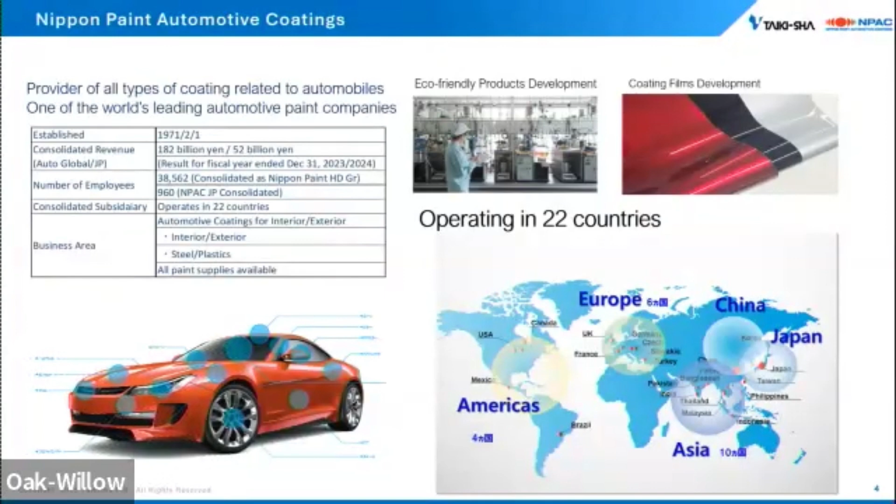Next, let me introduce Nippon Paint Automotive Coating. We call it NPAC, a key subsidiary of the Nippon Paint Group. NPAC is one of the world's leading automotive coating companies and operates in 22 countries around the world under a strong global network. In response to recent environmental issues, we are developing environmentally friendly paints and coating films with a view to eliminating the need for painting. Today, we are pleased to present results of a collaborative effort between these two companies, showcasing the synergy achieved through this partnership.

Next, let's move on to our target. A major theme in the world today, and of course, specifically in the automotive industry, is carbon neutrality. Nearly every major OEM has announced their goal towards carbon neutrality, not only within the use of their products, but the complete life cycle of those products, including its manufacturing. We are all, of course, aware of the paint shop status as one of the primary energy consumers and carbon emitters within the manufacturing portion of the product life cycle. And innovation is necessary in order to achieve these fast approaching targets.

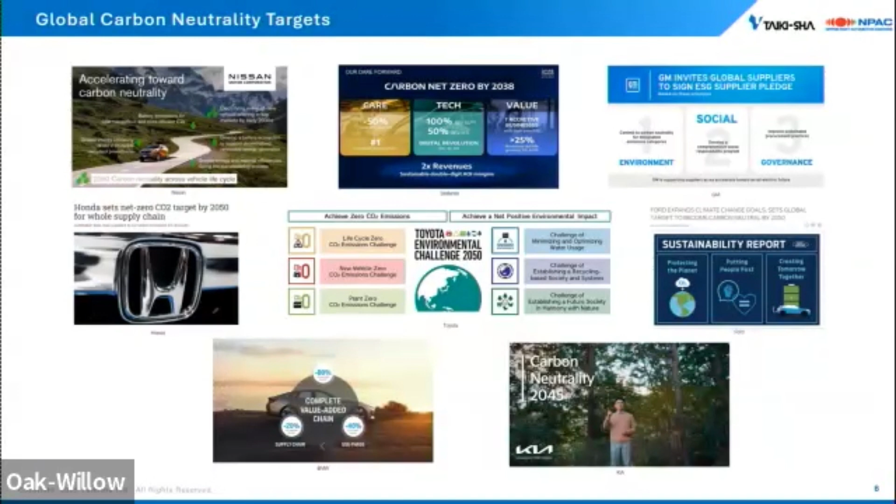So, what can we do as material supplier and line builder to support our customers? The focus comes on how can that directly and indirectly impact our customers' emissions. In upstream scope 3, we can consider reducing material usage, recycling materials, and lowering energy consumption in our own manufacturing process. In scopes 1 and 2, we can provide them with processes with lower energy requirements and a smaller footprint. And in the downstream scope 3, can our processes enable greater product efficiency through weight reduction and be compatible with the EV manufacturing process in general?

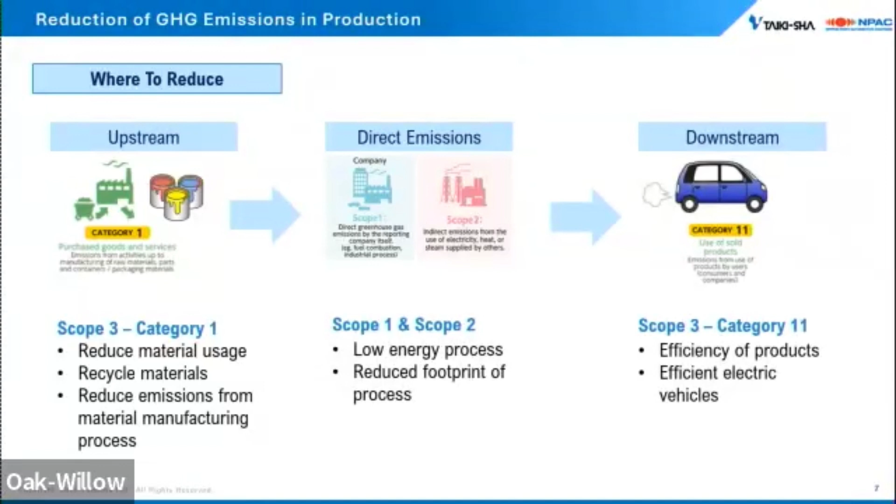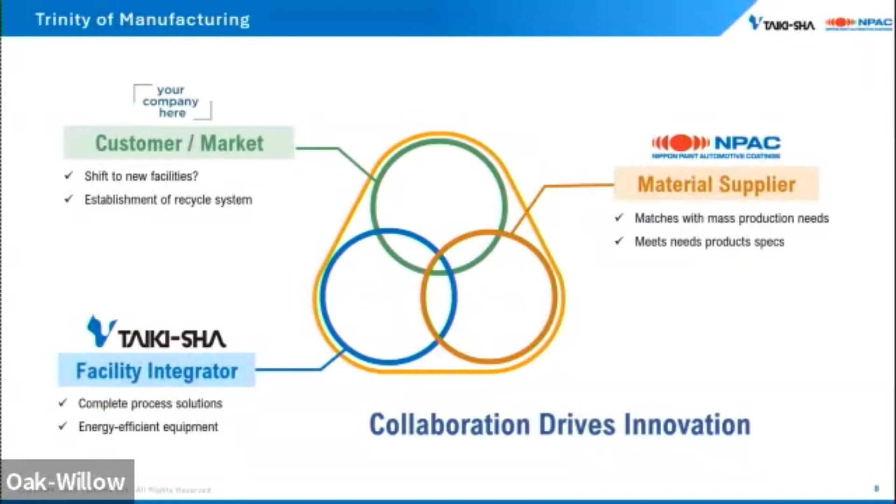Instead of simply pushing current methods to their limits, our approach is to offer a completely new option by transforming the coating process itself. How do we achieve this solution? We believe collaboration among the three sectors of the manufacturing industry, the material suppliers, equipment suppliers like ourselves, and OEMs, is critical to driving sustainable innovation, as this conference is focusing on. Today, we'd like to introduce our film decoration technology, share demo trial results, and explore how teamwork can lead to further process improvements, helping us get closer to realizing the broader benefits of this solution.

Now I'd like to show our proposal. We are all familiar with the best practice in traditional spray coating to reduce energy consumption. However, there is a limit to how much progress can be made when relying on processes that require significant air manipulation, such as spraying and curing. Our dry film decoration process offers a breakthrough. One, the same coating material can be applied to both exterior metal and plastic interior and exterior parts, simplifying the process. Two, energy usage is reduced because air manipulation and curing requirements are minimized. Three, materials can potentially be recycled. Peelable films from damaged or scrapped parts can be sent back for reuse.

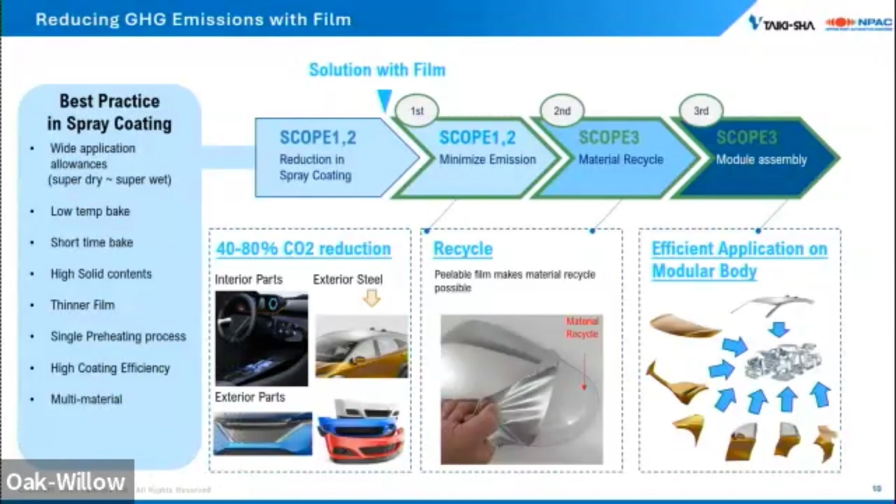Additionally, this method is compatible with a wide variety of substrates, enabling the use of lightweight materials like plastic hoods or CFRP doors without the compatibility issues or curing restrictions seen in traditional coating. While film application is not necessarily a new process, many questions need to be answered in order for it to be truly considered for adoption to replace traditional processes. What are the environmental benefits? What is the energy saving effect on the process? What are the emissions involved with the film manufacturing process? Is there an environmental impact with the film disposal? Or can the material be recycled?

Quality needs to be answered from both the design characteristics and the physical application and durability. Can body colors be matched? What other levels of customization can be achieved? How does the color shift as the film is stretched and applied over complex shapes? How durable and weather resistant is the film? And of course, the process cost.

What are the comparisons of equipment cost and process cost compared to a typical paint process? These are extremely important questions which we have set out to answer in our trials to demonstrate the potential that lies within industrializing an OML coating process for automotive.

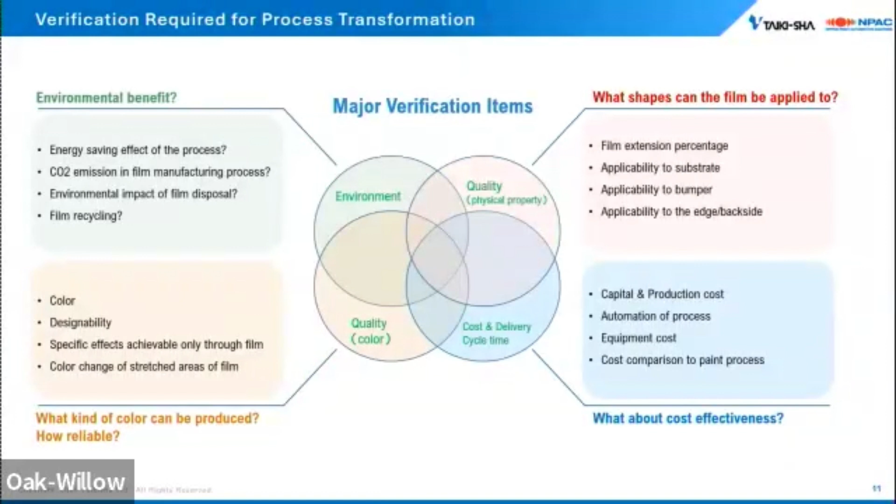First of all, I'd like to explain about the decorative film. The film is comprised of 4 basic layers sandwiched between protective films. From top to bottom, the film includes a UV clear coat, a PMMA film as a supporting base material, backed with a design layer and an adhesive layer underneath. The first step is to coat the UV clear coat on the PMMA film.

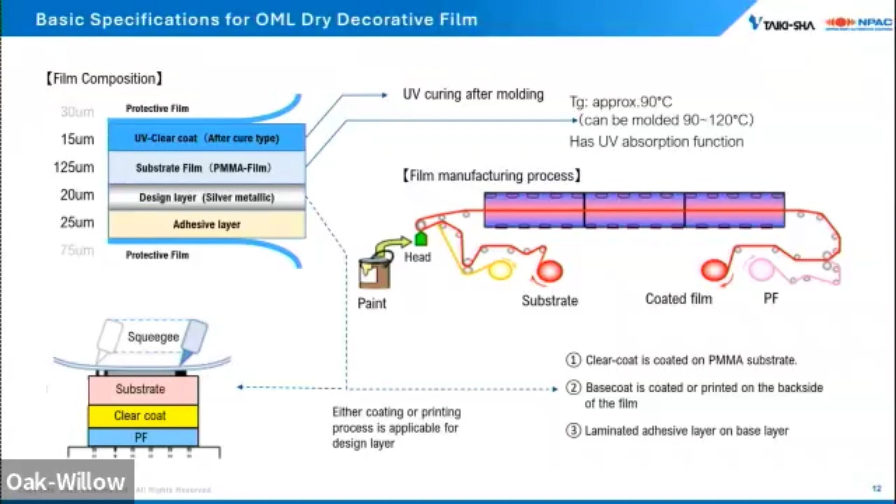Productivity is high as a roll of film with a width of 1200 to 1500 millimeters can be coated at the speed of 10 to 20 meters per minute with a drying time of only 1 to 2 minutes. Next, the base layer is applied to form the desired body color, designs, or images, which can be applied using printing or similar technologies. Finally, the adhesive layer is processed.

I'll also explain a little bit about the characteristics of the films. We are a paint manufacturer. Naturally, we have confidence in our color design, and we aim for quality that can only be achieved by a film made by a paint manufacturer. One example is our pigment dispersion and alignment technology, which enables us to produce films with a high level of design and also enables light and radio wave transmission while maintaining that design.

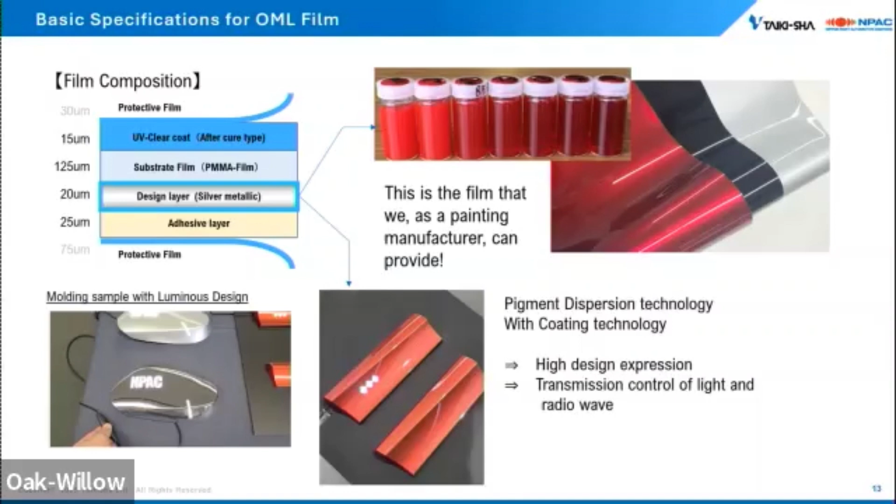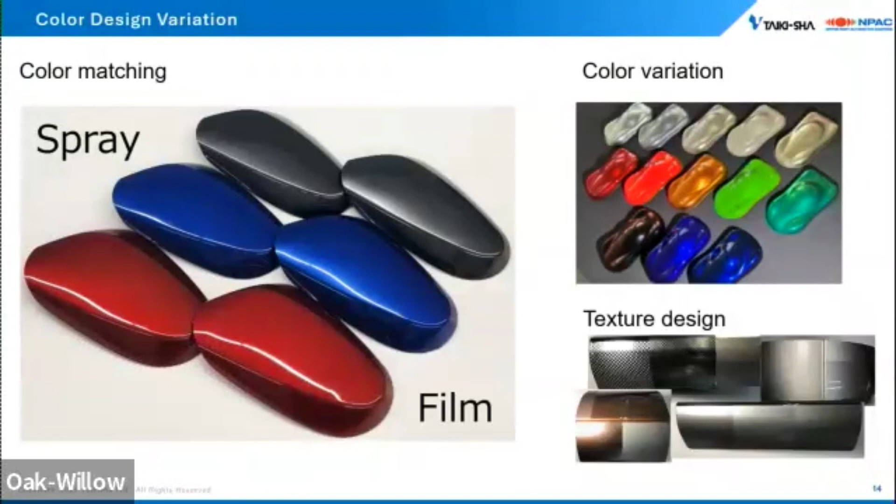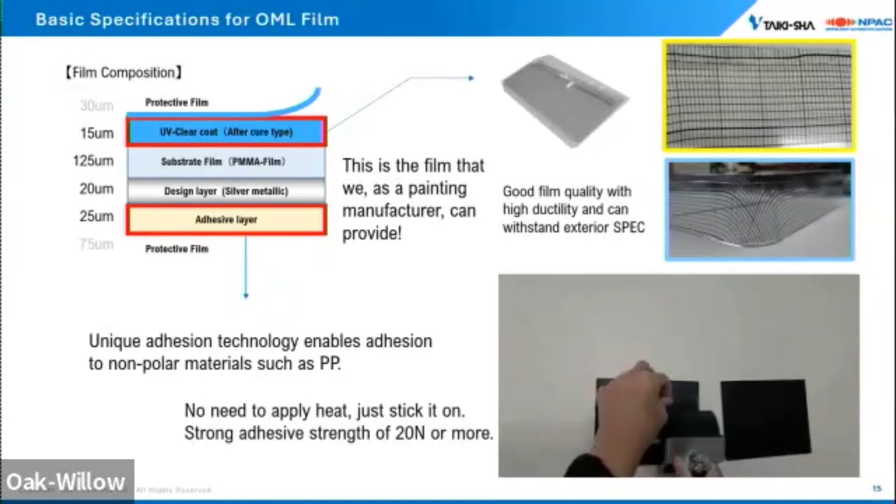As you can also see in this page, we can achieve designs suitable for film decoration, including designs comparable to spray coating, matte finish designs, designs with various colors and functions. Next is the clear coat on the topmost surface layer. Its greatest feature is that it can be stretched by several hundred percent and still be applied to automobile exterior specs. The adhesive layer at the bottom of the layer composition is also unique. Utilizing our unique resin technology, even non-polar materials such as PP can be bonded without problems.

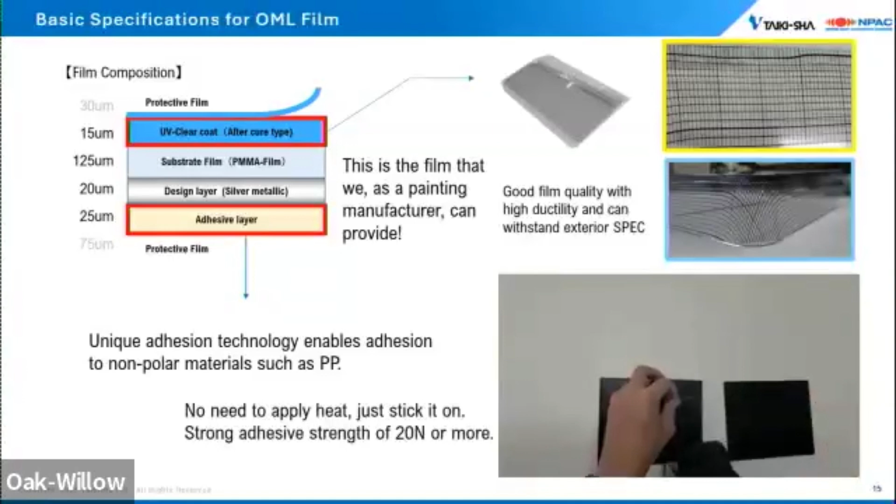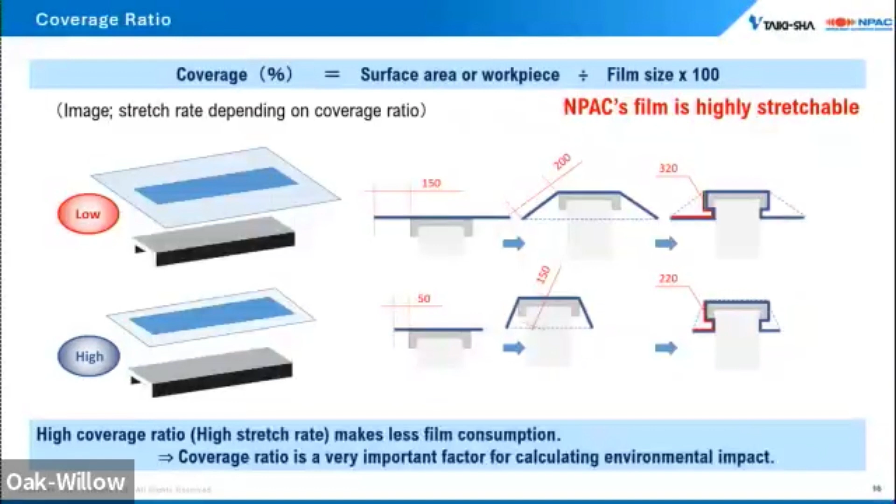As shown on the previous slide, it is possible to stretch the film by several hundred percent, and this is very important. Here is a perspective on coverage, but the point is very simple. The more stretchable the film, the less film is needed to cover the same workpiece. This is a very important characteristic as it directly leads to the cost and the environmental benefits.

With paint film as the material selected, from the process side there's a lot of different application methods that we can consider. When we look at the primary needs of the automotive coating industry, such as managing complicated shapes, the ability to potentially remove or peel the coating, transparency control, and application across a wide variety of base materials, we determined that outmold lamination, or OML, would be the best candidate for this.

We'll have some colleagues now start to pass around some samples of parts that have been film coated using OML for you guys to see. To see these parts and the color match compared to a traditional liquid spray painted part, you can visit the Nippon Paint table over in the exhibition area during the session breaks and get an up close view of everything.

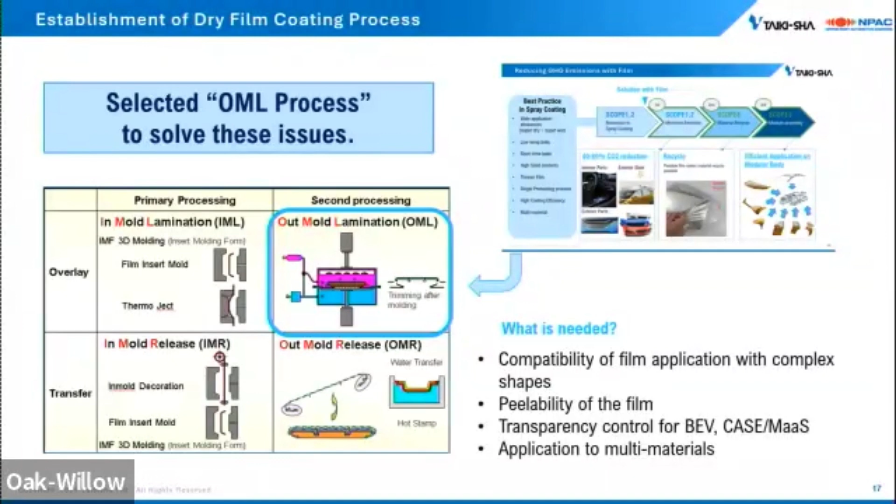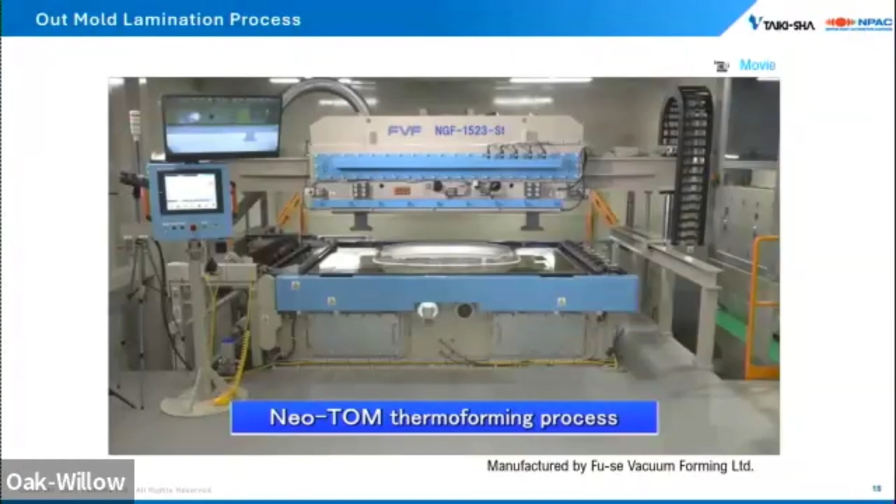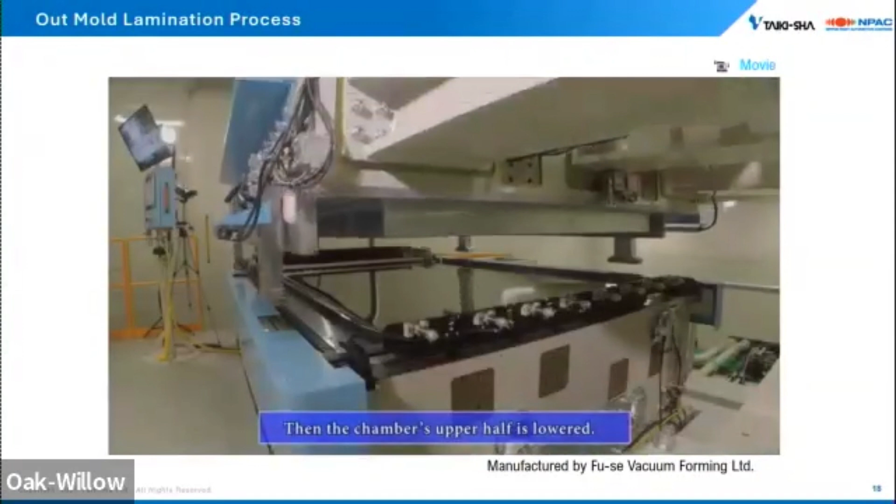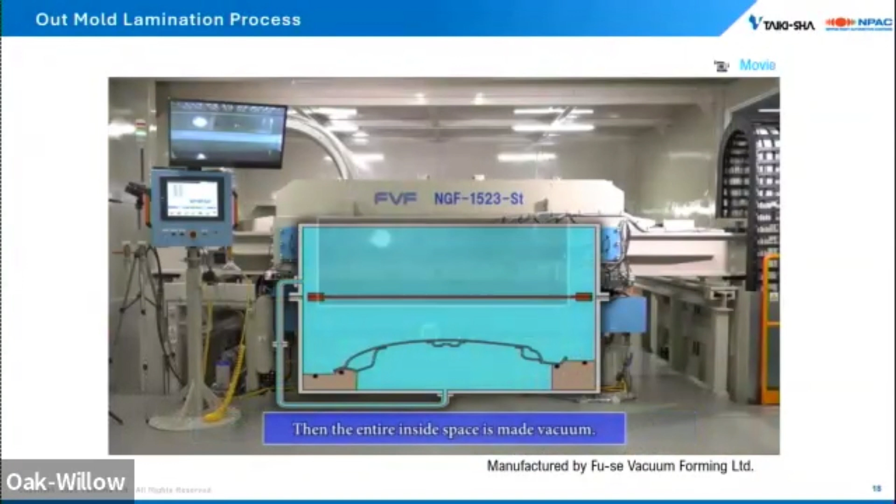For those not familiar with the process, this video will show an example of how an outmold lamination or OML machine works. This video is going to demonstrate the process on a hood, which is a fairly basic and straightforward shape. First, the part is set in place, the film is drawn across, and the piece is lowered further into the machine, where the film creates basically an upper and lower half within the chamber. The chambers are brought completely under vacuum, while the film is heated with IR heaters to promote its flexibility.

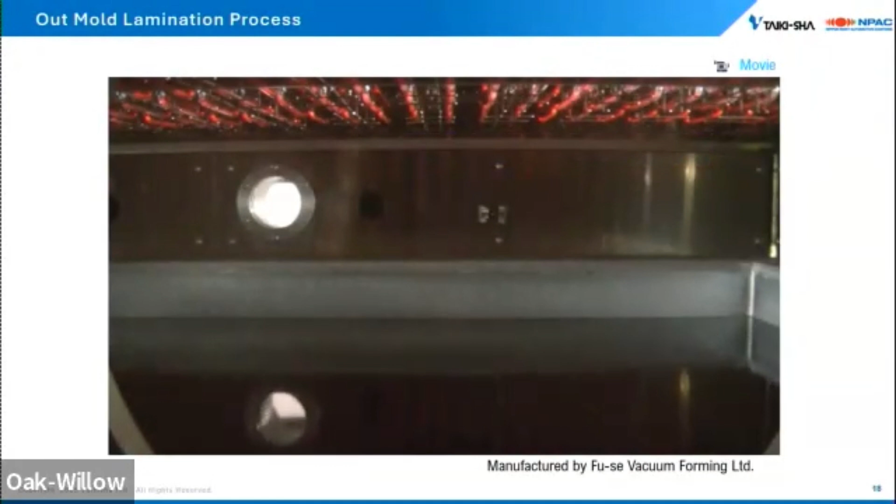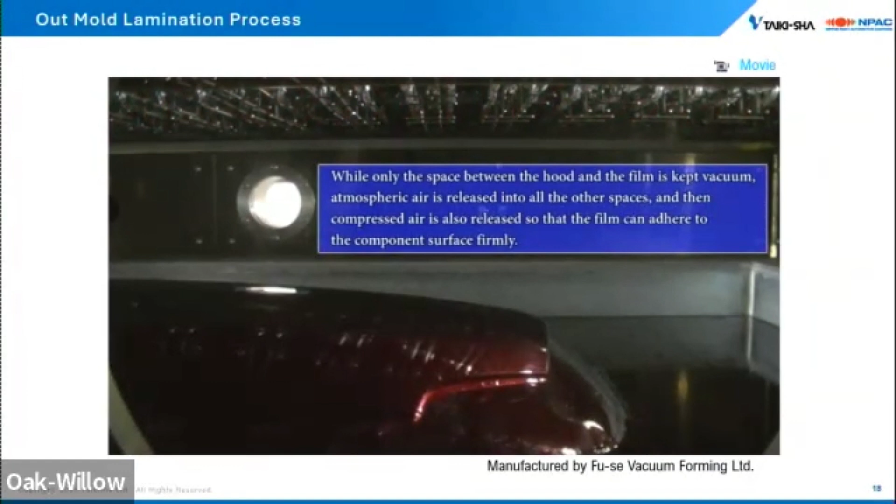Once the film is brought to its desired temperature, the part is mechanically pushed up into the film, with the lower chamber kept at a vacuum and then air released into the upper section to firmly adhere the film to the hood, maintaining a positive pressure on the exterior to ensure an application without any gaps or bubbles across the entire surface.

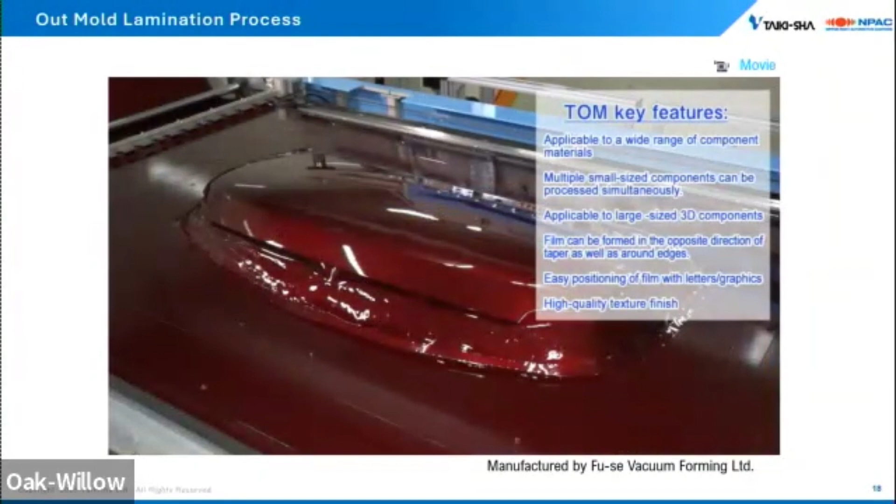In this next video, we'll show our concept for industrializing a coating or decoration line for fascia production using OML. When you compare it to a typical fascia paint shop, the dry film line makes it possible to realize dramatic space saving in terms of the size of the building.

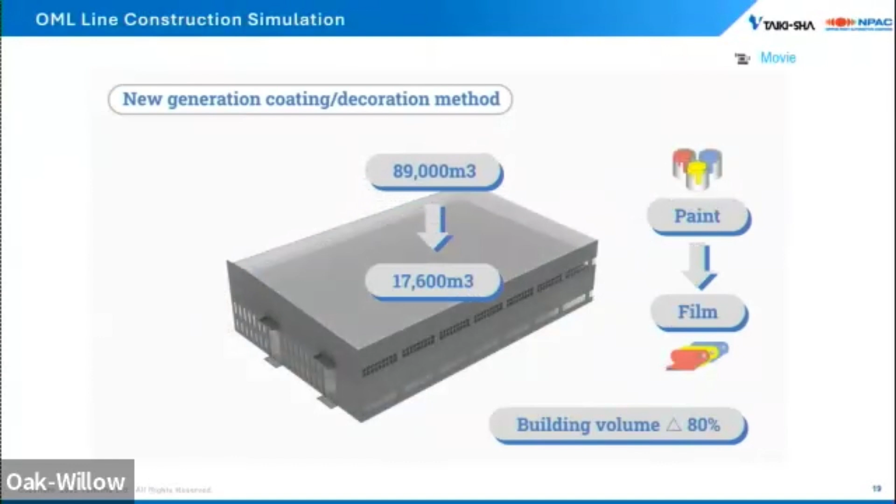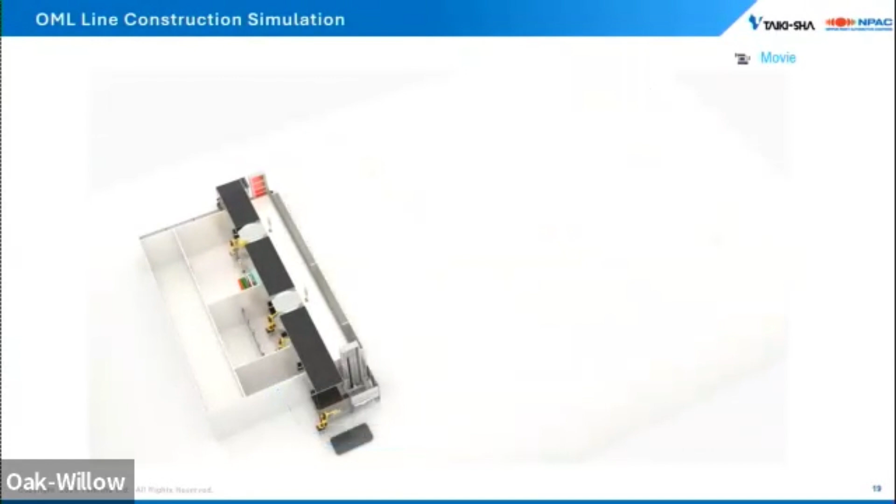The line shown is going to include 4 modules, 2 each for front and rear bumper production, which allows us to achieve a net 1-minute takt time per bumper set produced, or a takt time of 2 minutes per module. The main line has main components of the clean room for decoration, the trimming room, and then auxiliary rooms for the controls, pumps, and other equipment.

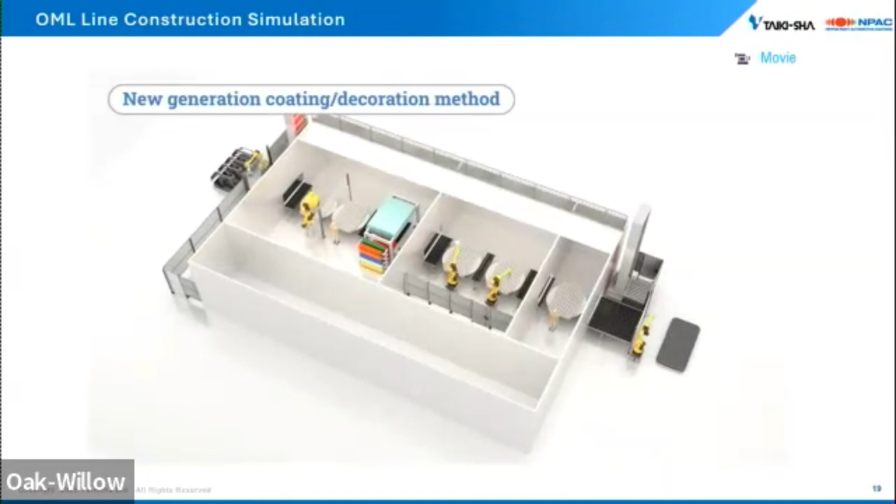First, the molded part is going to be robotically loaded onto the jig before then transferring into the clean room. The first station will use robotic cleaning to prep the surface and make sure we have a clean surface before it's transferred into the OML machine for the film application.

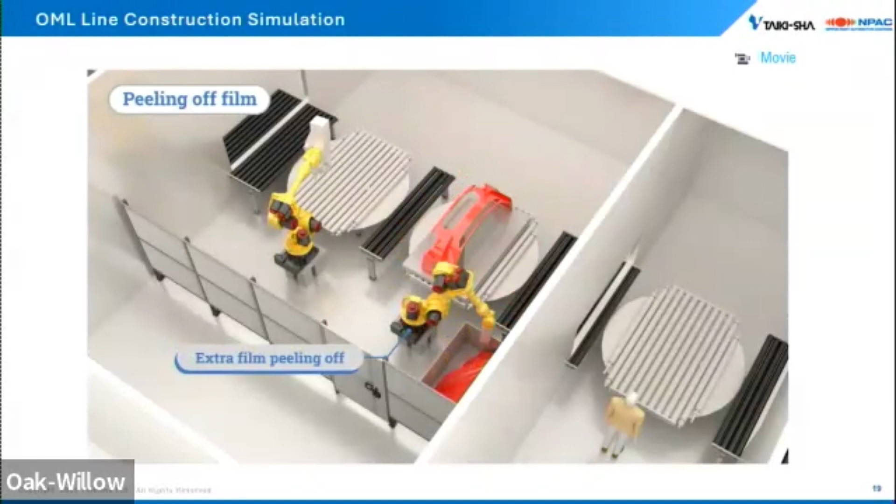Once the film's applied, the part is transferred out into the trimming area where we have robots laser trimming along the shape of the bumper, and then robots removing the unnecessary and excess film from the areas that aren't required for the production part. That decorated part can then be checked and loaded by robot onto its transport, which in this case, we're going to show an AMR to send it off to the assembly line.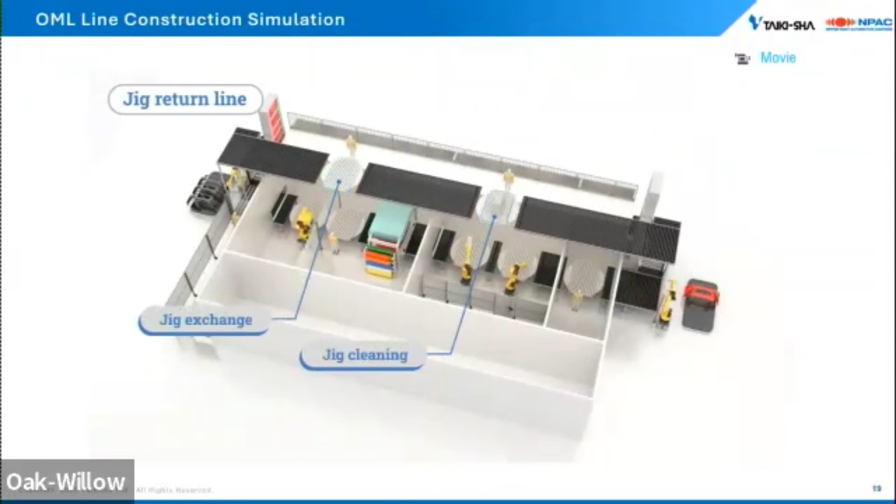The jig will be sent back through an overhead conveyor to be cleaned if necessary and returned back to the beginning of the process. Or if you have a parts mix, you can swap out jigs here, or swap out jigs that are heavily damaged and need to be replaced.

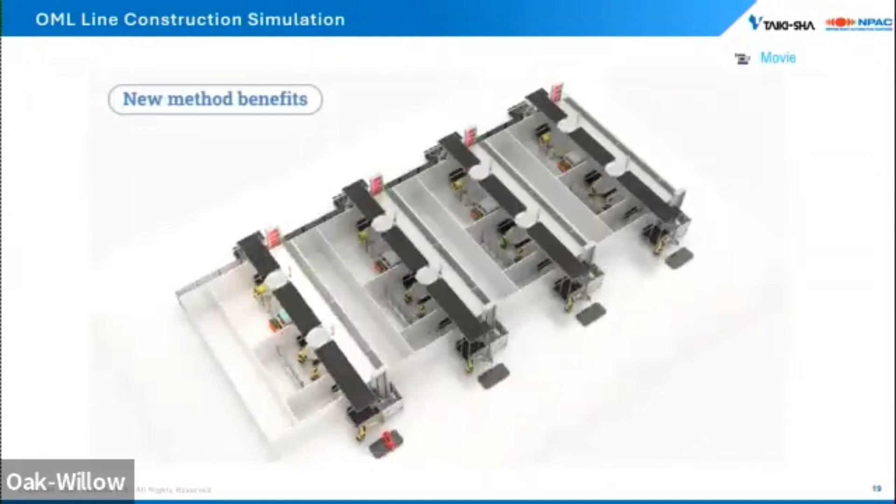In a kind of a preview of some of the results to come, we're estimating CO2 emission reductions in excess of 50% for the decoration process, and 80% reduction in both the building size and the part lead time from start to finish.

As I showed at the beginning of the video, tremendous space-saving results can be achieved using this OML-based process to greatly reduce the size of the building, both from a building volume and a floor area standpoint. That lead time goes from 2 hours from start to finish when you're including all of the spray, cure, and checking, down to about a 20-minute start-to-finish process, reducing your overall parts and WIP.

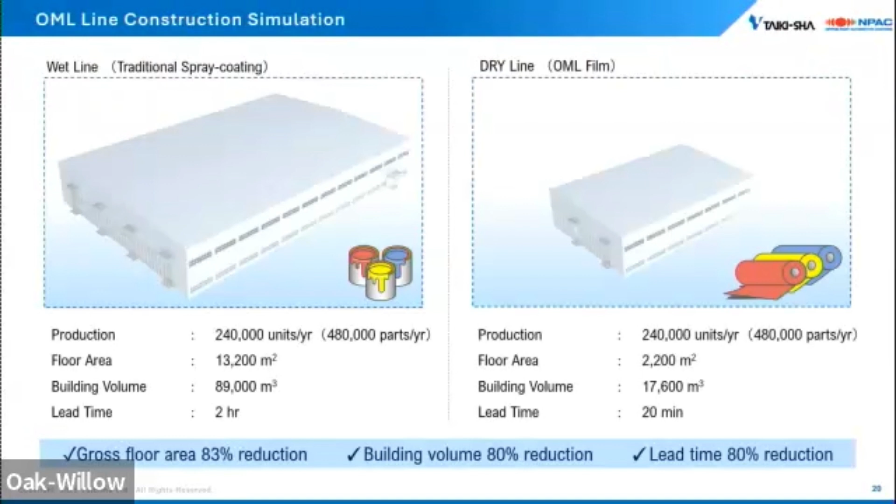As we mentioned earlier, really the impetus of this is based on the environmental impact of moving away from a traditional spray process. This table is using the same fascia line with an annual output of about 240,000 car sets per year as the basis of comparison.

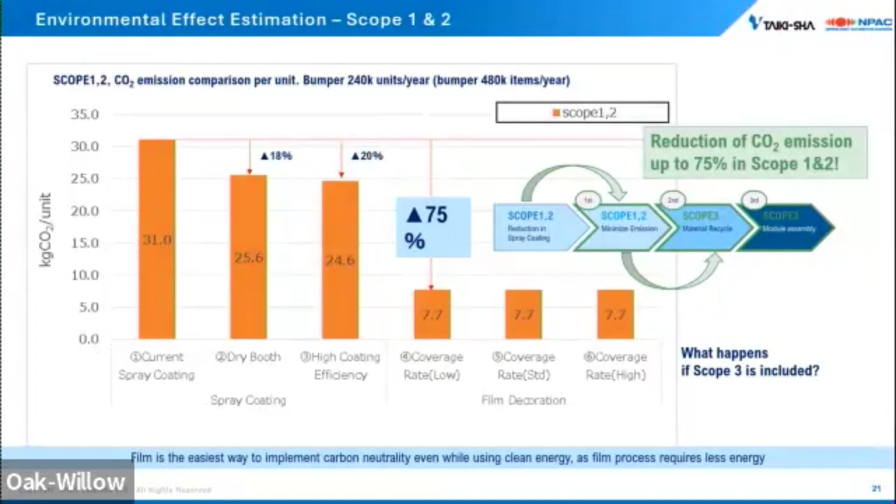But the film process is more significantly affected by a high coverage ratio than a traditional spray application is to a high TE application. As Iwakoshi-san mentioned earlier, that coverage ratio really is key in terms of your efficiency of material usage. And when you consider a high coverage ratio, your benefit, even including the Scope 3 emissions of the film manufacturing and waste, is greater than 50%.

And yes, the emissions of the production of the paint film are relatively high, but that's because you're moving the cure, as mentioned by Iwakoshi in the presentation before us, from the plant level to the material manufacturing. But since you're only curing the film, you're not having to heat up the entire body in the process. That's where you're more than offsetting that increase with the benefits of the process at the plant level.

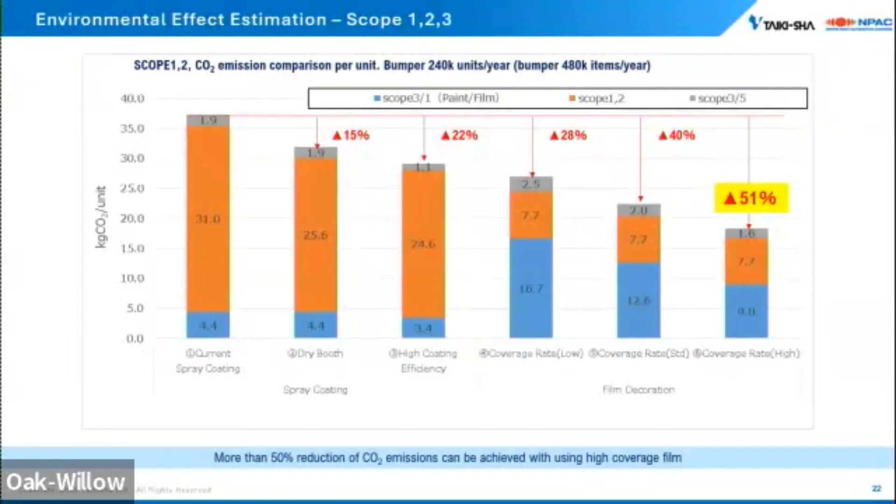And of course, this is before considering the change in material cost of paint film versus liquid paint, but it also doesn't factor in the labor cost savings of a fully automated line. This benefit is good in and of itself, but that overall reduction in consumption is really the main point here.

Even as some plants move towards full electrification, electrifying ovens and air houses, this is really only shifting consumption from gas to electricity. And while your direct process emissions may be reduced or eliminated, the emissions caused by that increased consumption and generation of electricity need to be considered when looking at the overall package.

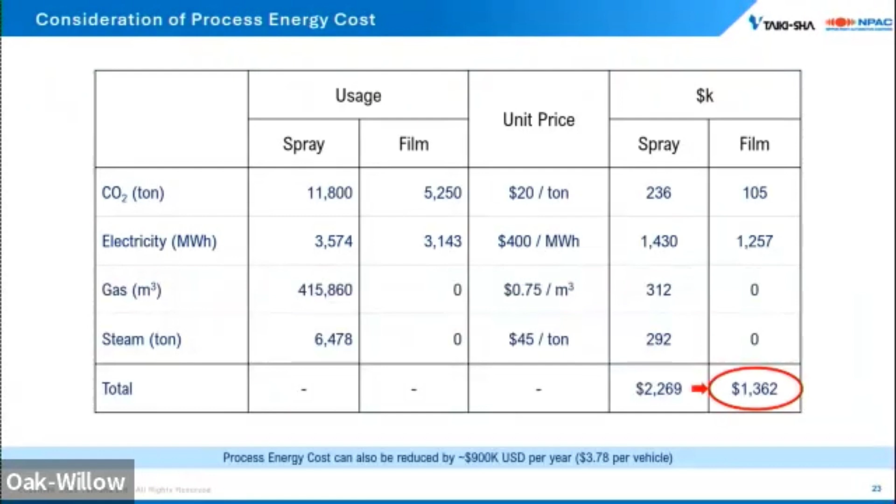So to summarize, we really see an incredible amount of potential in a dry film process for decoration. The line is fully electric, uses less energy overall by eliminating the ovens, large scale and precision air conditioning, and reducing water and waste treatment consumption.

These features directly contribute to a significant reduction in CO2 emissions. The process uses a much smaller physical footprint. It can also be fully automated to give consistent quality, and a modular line structure gives you design flexibility and also reduces the time to construct the line compared to a traditional paint shop.

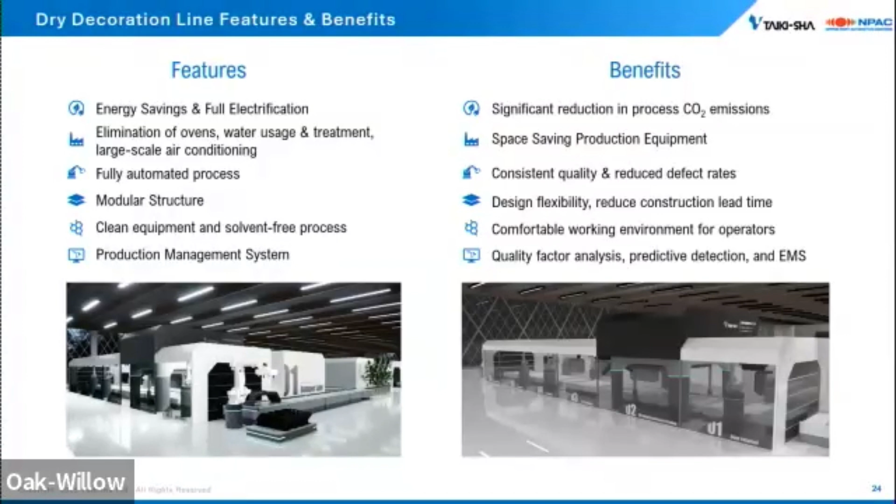And as well, a clean and solvent-free process leads to a much safer and more comfortable working environment for your production team members. I'll hand back over to Iwakoshi-san to review the trial results from their material application.

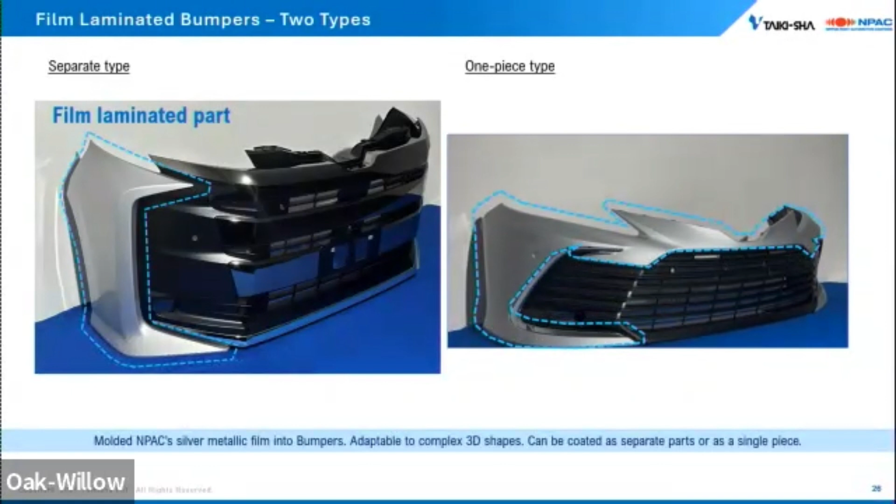Oops. Oops, sorry. Oh, okay, so this is a OML.

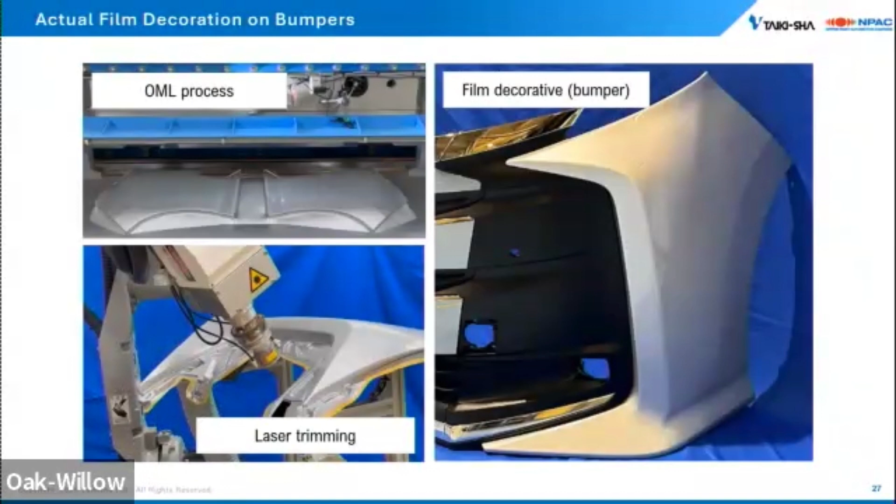This is a demo trial photo, from the OML process to the laser trimming we can do it, so that we can get the prototype from here.

Oops. I'll show you the data of the... I'm sorry. The data of...

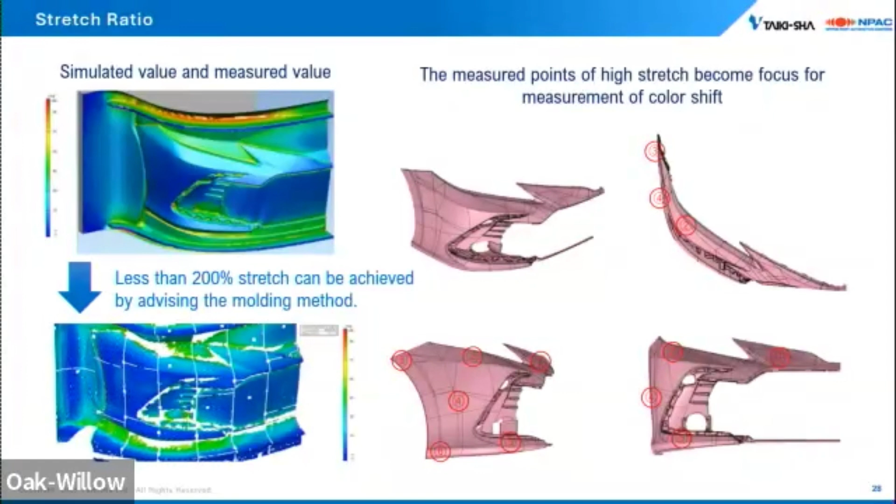As you can see, Taikisha developed the new OML process, and the elongation rate is less than 200% stretch. So the color change is very minimized.

As you can see from the 6 areas, we can measure the color change, and the delta E is a very small value, and this can be good.

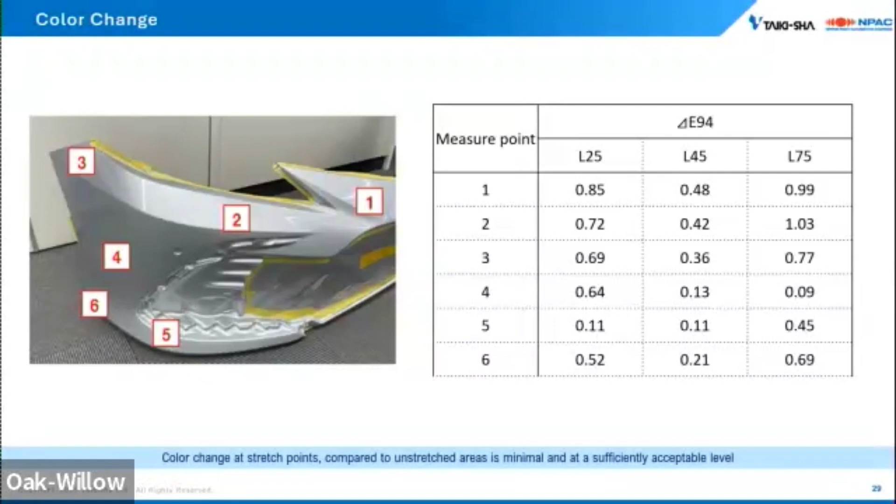Taikisha develops molding technology that does not cause localized high stretching, and NPAC develops film that can follow the stretching and does not cause hue shift. With our combined expertise, Taikisha and NPAC have realized the film decoration of the integral type bumper.

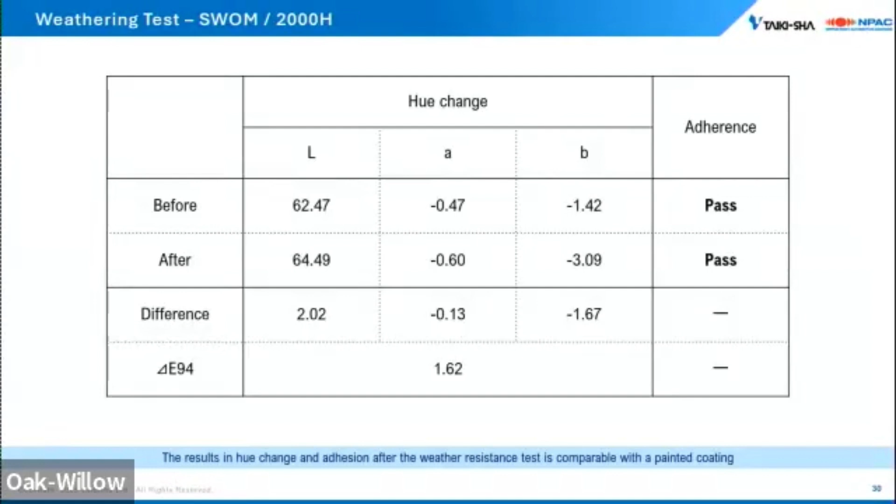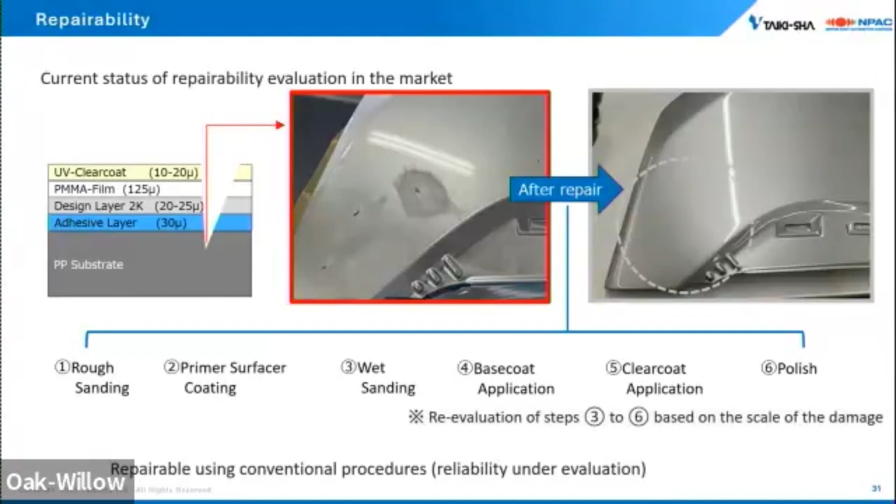This includes sanding, applying primer and surfacer, wet sanding, followed by base coat application and clear coat painting. And the final step is polishing. So for the next step, Joel will explain about that.

First, I'd like to call back to those verification questions we posed at the beginning, the questions we really need to answer if we're going to seriously consider a process that some could consider transformative or radical, depending on your view. From the environmental considerations, we're projecting a 75% reduction of the CO2 direct process emissions, or 30 to 50% reduction when considering scope 3 as well.

As Iwakoshi-san demonstrated, color matching to a painted body is absolutely achievable, and progress continues to be made in maintaining that color over high stretched areas. Not only that, but coating durability is absolutely in line with industry expectations, and the repair process development shows promise to meet that expectation as well.

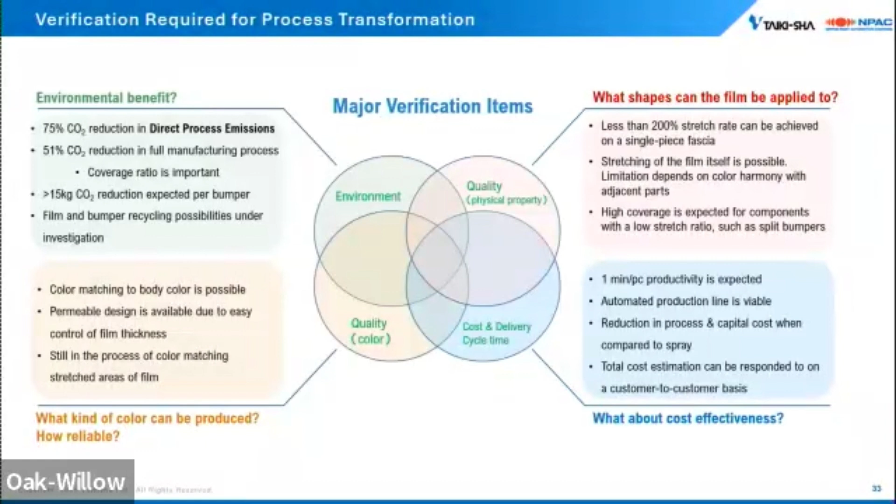From the process side, we can support parts with geometries ranging from full one-piece bumpers to hoods and sheet metal components, while the stretch rate can be managed through simulation of the wrapping process and optimization of the molds. From a cost effectiveness perspective, we project an OML line would lead to significant reduction in process energy costs, not to mention overall operating cost reduction from an automated process, and some reduction in capital cost as well.

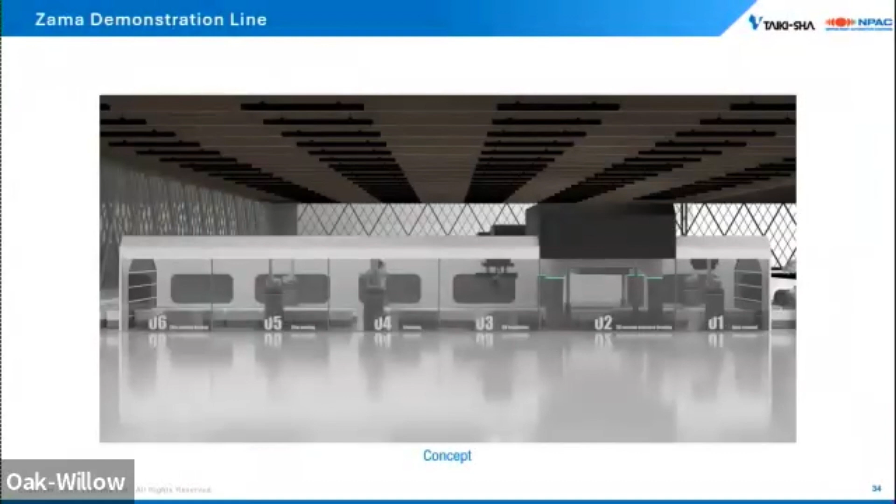With these considerations, we at Taikisha really believe in the significant potential of this process. So what are we doing to realize this potential? We've taken the steps now to go from a concept to detailed design, and now a fully functional demonstration line at our R&D facility in Zama, Japan. This line is going to function as our living laboratory to develop and improve each element of the process, test out materials from film manufacturers, and test out production parts for OEMs.

The line is now running as of this January, and we've started customer trials on the line as of March of this year.

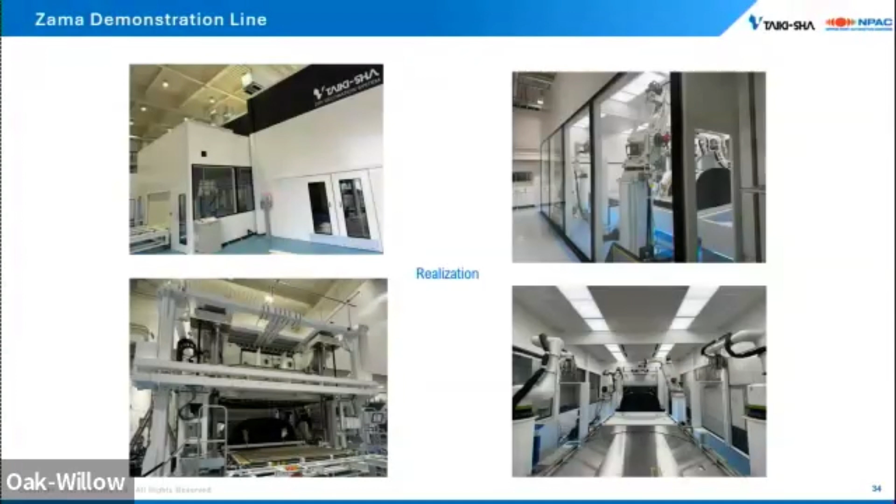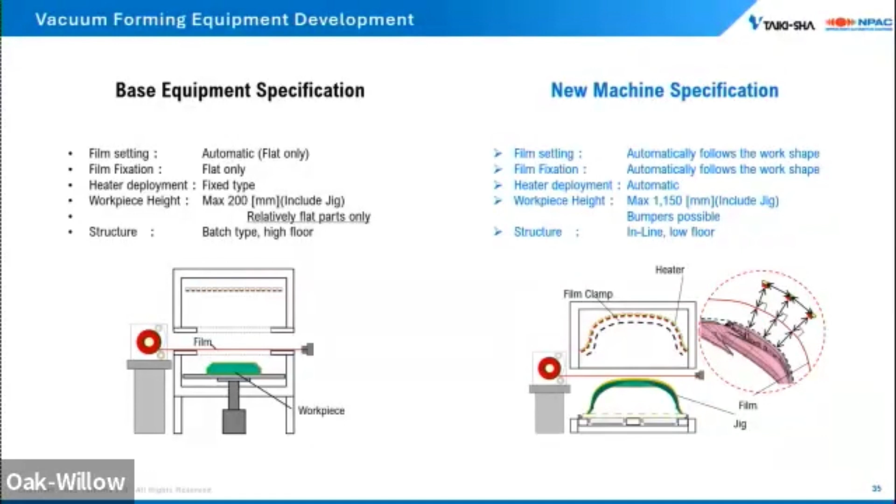One of the key elements of development is the OML machine itself. This OML machine from Fusei, shown earlier in the video, is really only suitable for batch type production, and the height of the parts to be processed is limited by the machine geometry to a flat, fixed nature of the equipment. You can really only do that one part. Our new machine at Zama features a flexible concept for setting the film that follows the shape of the part.

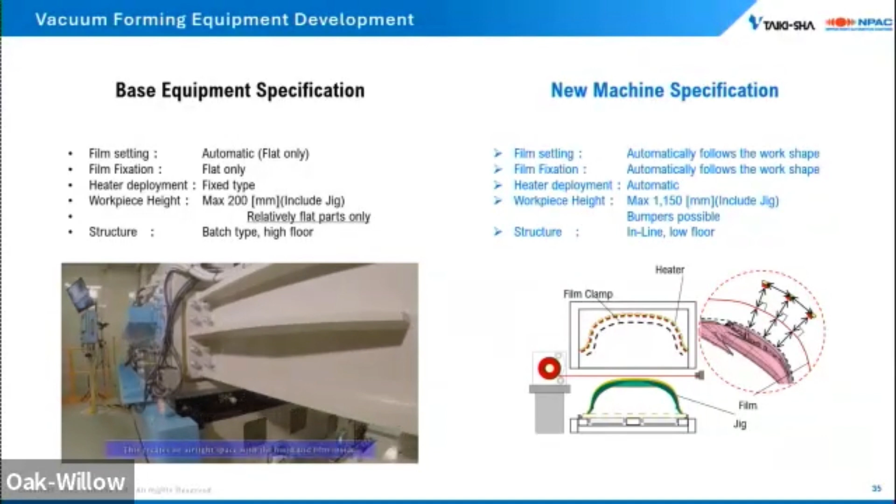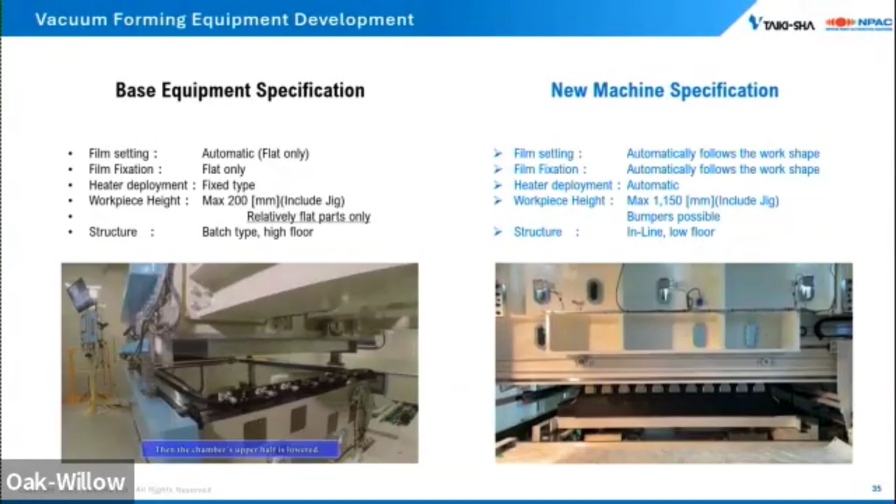It also has flexible heaters following the contour of the part shape. This allows us to process much taller parts, up to 1.15 meters on our demonstration line. Please don't consider this the limit of the process, as we'd be able to design the specific vacuum forming machine around the OEM parts. The machine is also designed with the ability to convey parts in and out, enabling series production in an inline process.

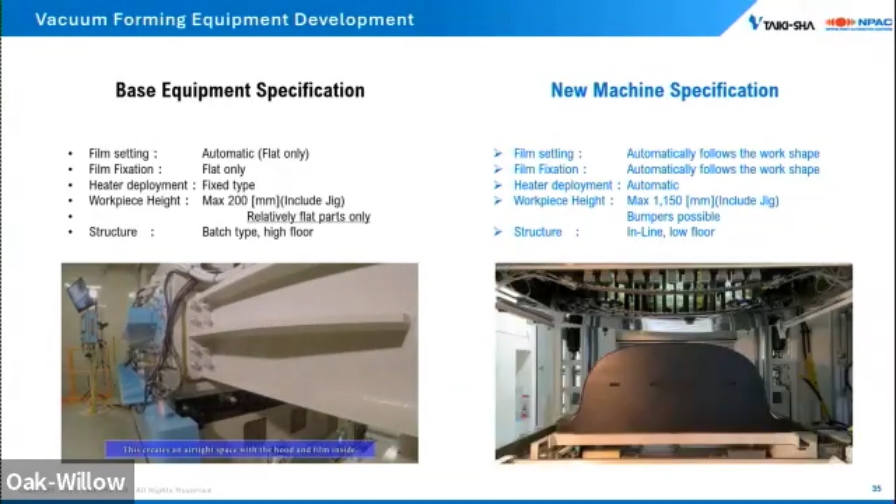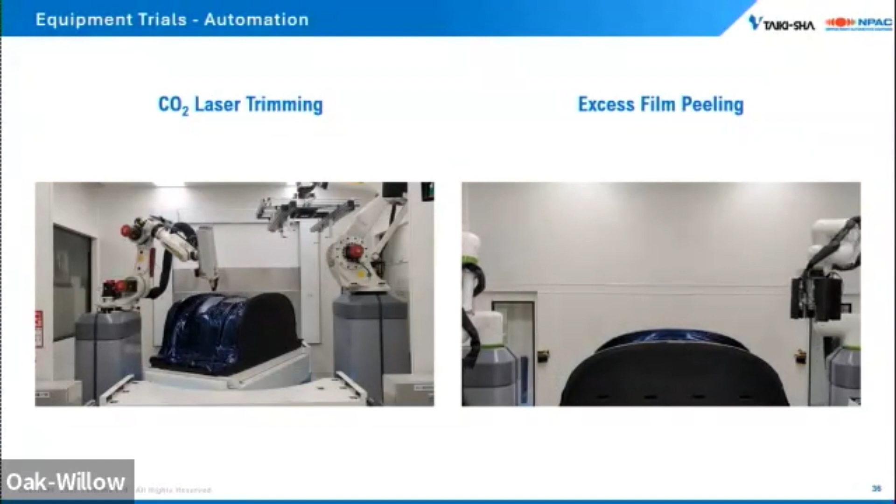I'd also like to quickly highlight the development and process tuning of both the robotic CO2 trimming and the robotic film peeling process. Both of these are ongoing at Zama, and automating these processes is going to be key to achieving a high quality and fully automated production line.

I think Iwakoshi mentioned this as well. But again, it's not a thermal cure. You're not using gas. You're using a lot less energy.

As I've mentioned, the line is in operation, and we'd love to work with you on this process development. That's why we're here today, to get the word out that we want to develop your materials with you. We want to work on your process trials because we really believe in this process and what it could mean for the coatings industry.

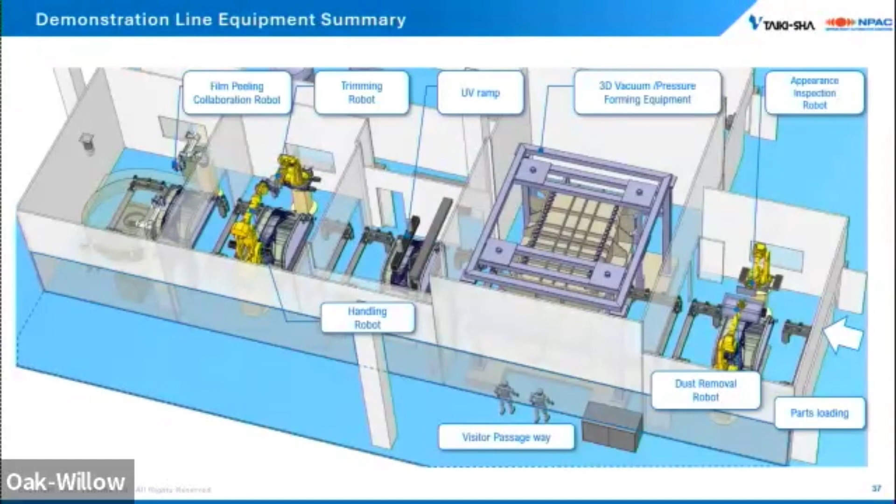Basically hearkening back to the theme of today's conference, collaboration drives innovation. We've got the equipment ready. Nippon and others have presented, have the material side. And from the OEM side, we are seeing interest. We have 5 OEMs on board doing production trials right now, and certainly more to come.

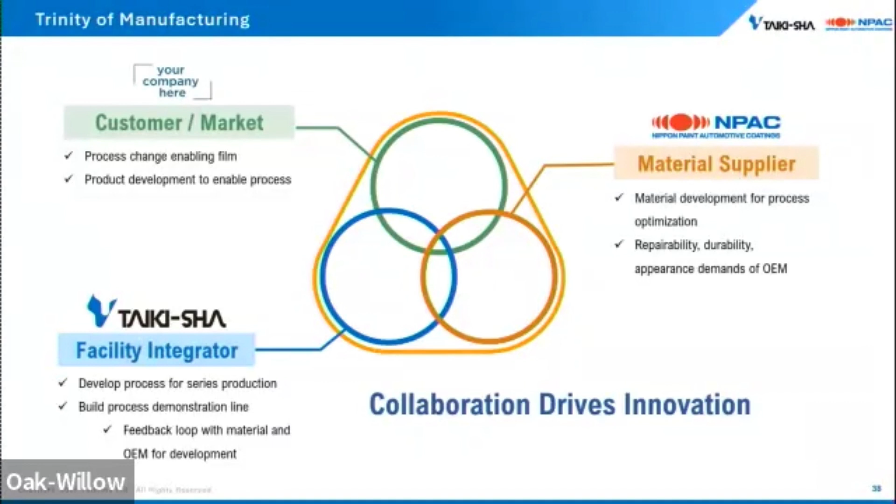From here, we've begun rolling out the introduction of the process through our exhibitions in both Japan and here in the US. We're continuing our conversations to keep that bond of the manufacturing trinity.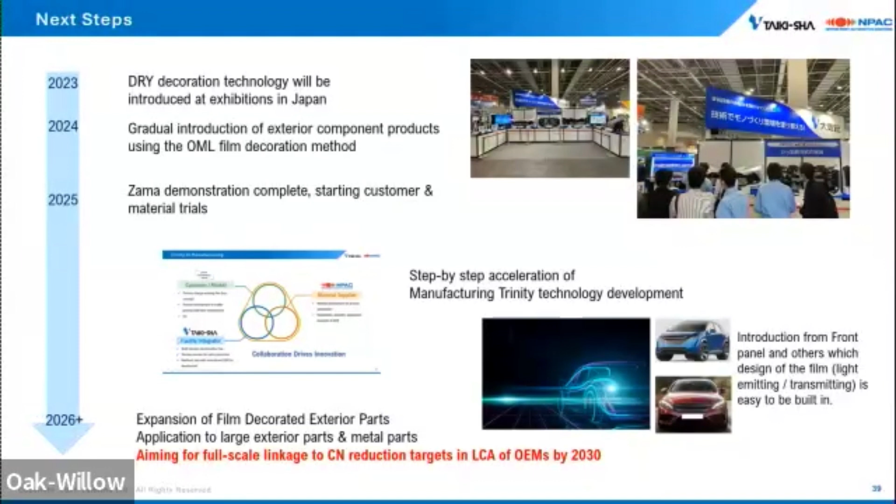The next major step of development we are actively working on in Japan is the ability to vacuum form complex metal parts on the OML machine, including doors, hoods, and deck lids that have holes and hems and are difficult to pull a vacuum on. We have process developments right now in place that we feel will be suitable for those applications.

And with that, thank you for your time, and we'll look forward to the questions.